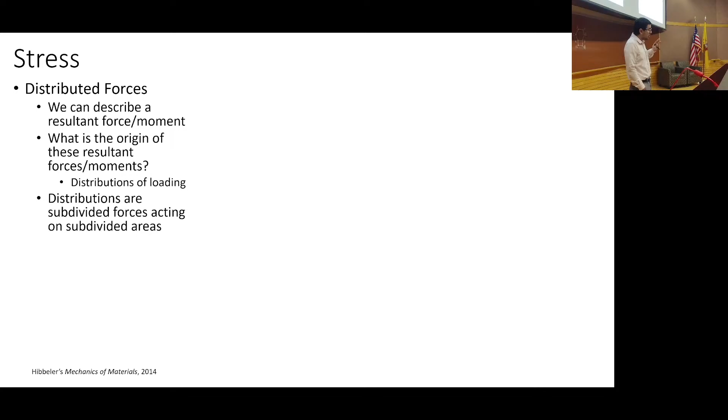So also dealing mostly with fluids, we're going to have stresses. All right, so what are your options for stresses?

What are the stresses we talked about in mechanics of materials? Yes, Andrew, shear stress. Okay, we're talking about shear stress, and we had the tensors with the subscripts. We're going to show a lot of that, we'll just kind of breeze through it, but this is kind of almost like a discussion at this point.

What's the other type of stress that we have? They say axial, normal stresses, right? So in a fluid system, what do you think axial stresses will represent? How do we translate those normal stresses to a fluid system? What are they? Right, so pressure. And when we were talking about pressure, now we've got essentially three stresses that are all the same: sigma x, sigma y, sigma z.

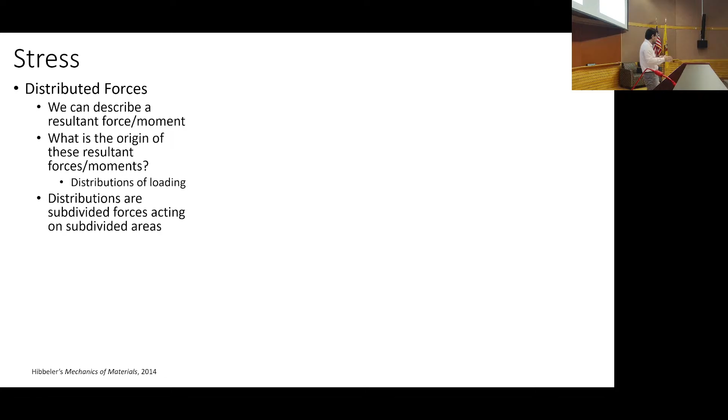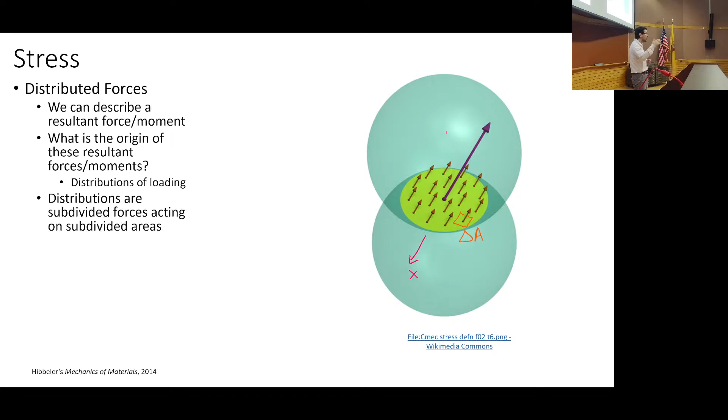We're talking about how we can break these things down. Like on a given surface, you've got some type of traction vector or force involved with it, and we're taking it over a small area. This is review, right, going through this whole business. We're going to say that we have these different components, and the normal component would be like a sigma zz, and that's just going to be a sigma z. And then in a fluid, that's just going to be a p.

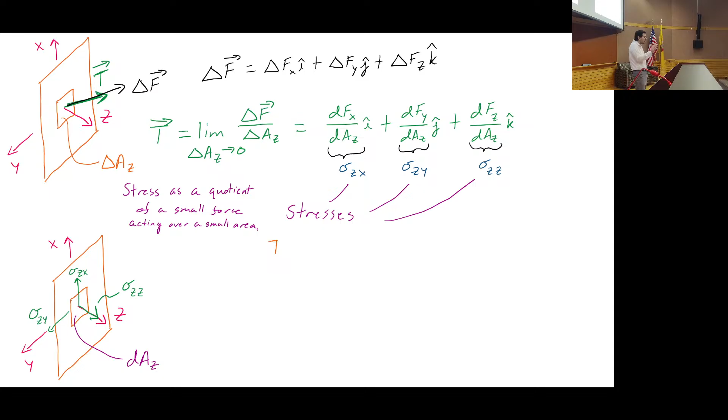And sigma z will be equal to sigma y, and will be equal to sigma x. So this is just kind of trying to make some parallels between what we've talked about in the mechanics world to the fluids world. We talked about how the first subscript usually describes the direction of the face, and the second subscript describes the direction of the stress.

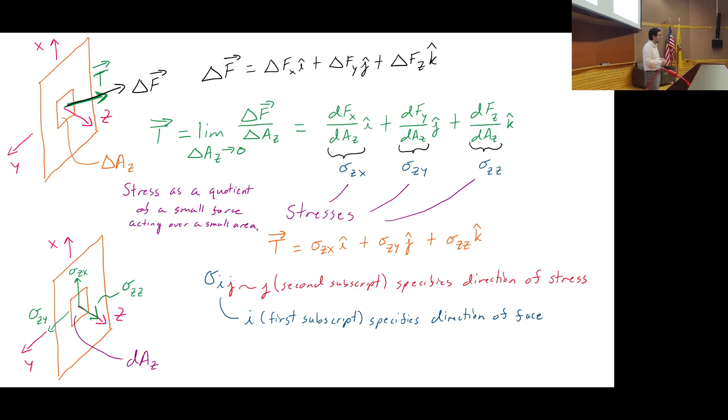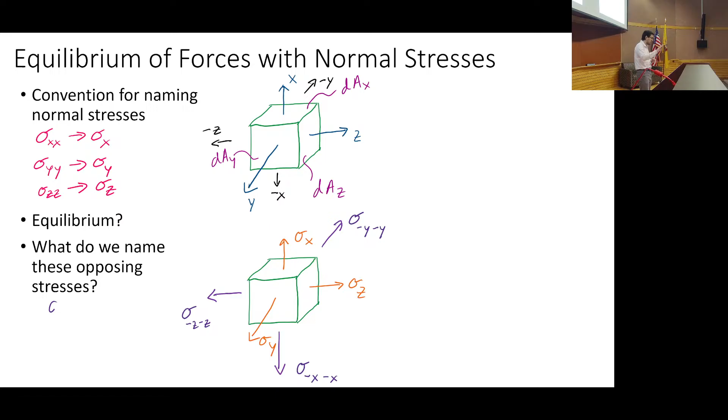So now shear stress is usually the more annoying one, and it comes up a lot. You've seen this, this is just a quick review of everything you remember there. Shear stress could be like tau zx, tau zy, tau xy, these types of things. And we've talked about equilibrium when it's a solid, moments and these various things going on.

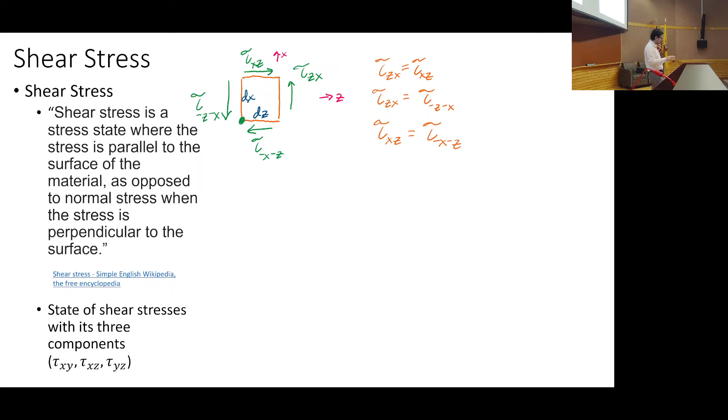It gets a little bit different in a fluid. But one of the things to keep in mind is that when we're dealing with fluids, when we're dealing with solids, we can still come up with a tensor.

And what essentially is the tensor? Do you remember what tensors are? How would you describe a tensor? Sure, Federico. I would describe it kind of like a generalized form of the order of elements within one thing. So like a scalar is a first order tensor, a vector second order, a matrix is like a third order. That's how I thought of it.

Okay, so at a given location, this is a little bit painful, some of the feedback. When you see the feedback in reviews from classes, sometimes it's a little painful. One person wrote back, I still don't know how to describe the stress at a given location in a solid, after the whole class. Like, ugh. The idea of coming up with this state of stress at a given location, I hadn't quite gotten that point across.

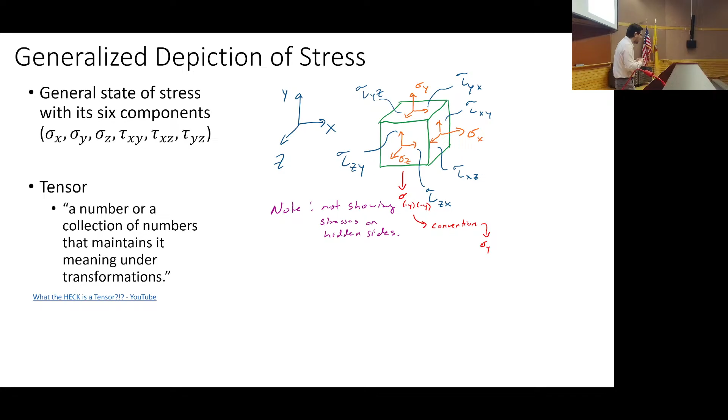And this is how you would potentially write one of these tensors at a given location. What's interesting is, at every location you can write this out for an isotropic material, and if it's elastic and all these wonderful things, simplified, then you really only have 6 components that you're interested in. You have sigma x, sigma y, sigma z, and then tau xy, tau xz, tau yz. Those are the 6. And so there they are.

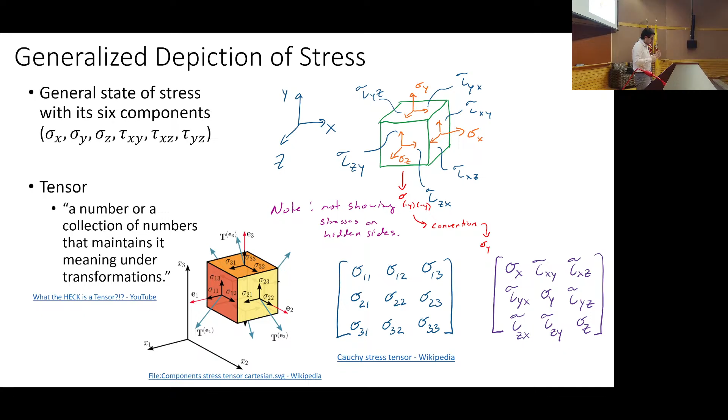Now so that's just a basic review of stress, really quickly. Anything else you want to talk about related to stress in mechanical solids? Any other thoughts, insights?

We often use simplified geometries, and that's because our world is made of a lot of simplified geometries, and then we can think about how the state of stress relates to whether or not the material will fail. We spend a lot of time looking at transformations. And Mohr's circle is one way to describe those transformations.

Even though the information is the same, when we have to compare it to criteria for failure that's been taken at a different orientation, we have to manipulate the state of stress so that we can see it and compare it accurately, for example, to uniaxial testing.

So, how many of you are taking fluids right now? Right, wonderful. How many of you are already taken fluids? Right, wonderful. Okay. So,

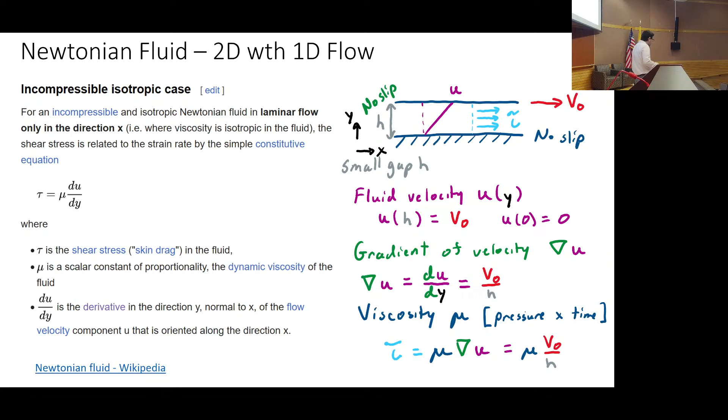So this gradient of u means that we can take this unidirectional flow and begin to think about what happens in 2D and 3D. And so this is just talking this stuff over again. And now, instead of the material element, we have the fluid element, which is a material element, really. And we can think of what's happening to the stresses on this element.

We can think of assigning a coordinate system, we can think of having a small length, and then we can think of it having a shear stress, as we see there. And then we have to have this element in equilibrium, so we put the stresses on it like that. Does this look familiar? Hopefully, yes. Okay. Any questions?

Actually, I have a question for you though. So if I wanted to think about the forces involved here, or yeah, let's talk about force. Let's say I know the cross-sectional area of the top plate and the bottom plate.

Now we talked about what's happening with fluids. Now that you see this V naught, you see the U, you see all this stuff. How much force do I have to apply to this plate on the top to get the velocity V naught? Because this is kind of important. When we do our fluid simulations, we're going to end up thinking quite a bit about lift and drag on airfoils, on cylinders.

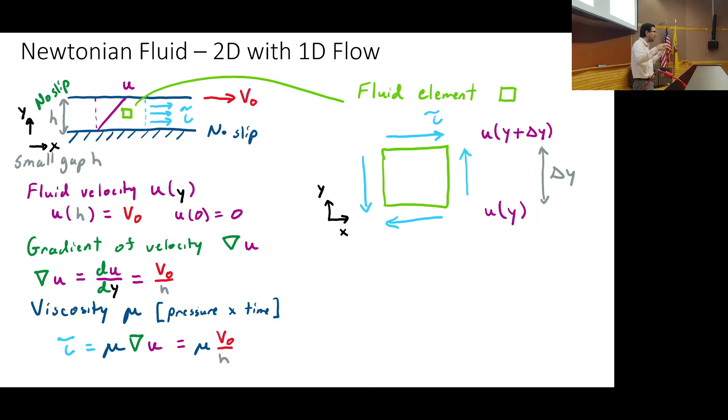Now, this is assuming that this is a Newtonian fluid and it's laminar flow. And we said previously that the shear stress is equal to mu times du/dy, and that's for flow in one direction. But if you have 2D flows, you have flow u in the x direction, and you're looking at the y direction. That would be one. But you could also have a flow in the vertical direction, a v, and be considering what's happening as you go in x.

So your tau xy, which considers both of these components, is actually the viscosity times the sum of the partial derivative of the x velocity u with respect to y, plus the partial derivative of the y velocity v with respect to x. And so you see here we have this tau xy, the skin drag, with partials of u with respect to y and partials of v with respect to x.

And we can then expand that to the 3D case on the right, where you have this matrix. What do you see there? You see, oh, I've got partial of u with respect to x. Is that going to create a shear stress? No. Someone said no, right?

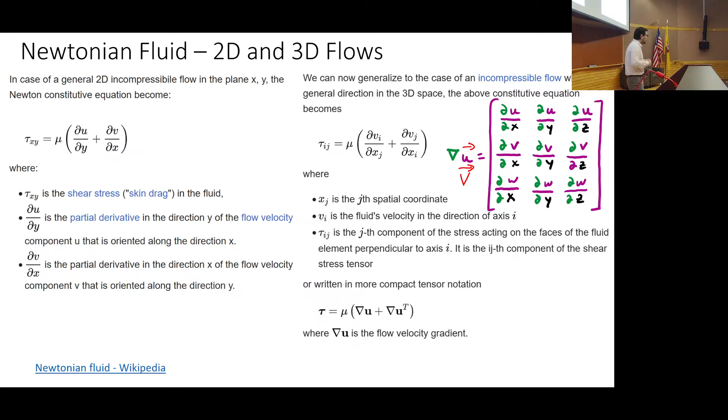So you can think now in 3D that we can describe tau xy, tau xz, the tau ij components, and it's going to be these combinations of the two corresponding partial derivatives. Any questions on this? And then we have this compact tensor notation if you want.

But what we want to get to is that mu is very important in terms of relating the gradients in the fluid flow to the shear stresses that we have in the fluids. Any comments, questions, concerns, ideas?

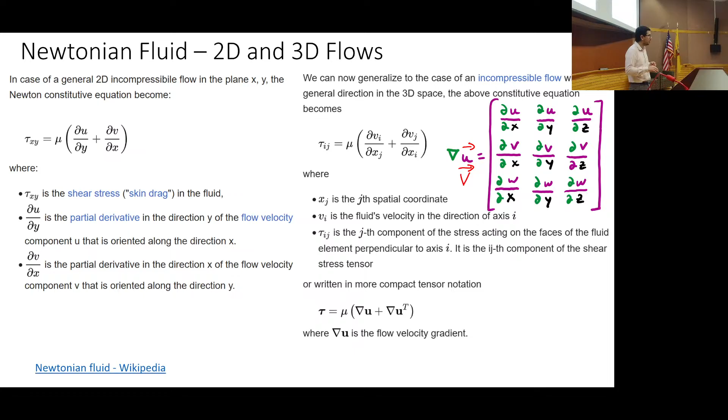Anyone watch these videos? They're really good, right? I don't know. As The Efficient Engineer, I don't know if they've ever made their face public. No, they haven't. Kind of like the organic... isn't the organic chemistry tutor? That's another one of them, right? They just have all these wonderful videos.

Okay, yeah, so if you're interested in understanding viscosity in a very clear fashion, I do recommend this video. And I have another video too that you can watch.

Now, someone tell me, what is the Reynolds number?

It depends on the configuration that you're dealing with, whether you're going to be turbulent or not. So like in aircraft and planes, we're talking about Reynolds numbers that are like hundreds of thousands when you get to turbulence. And then in certain pipes and different things, you're going to be looking at hundreds or thousands.

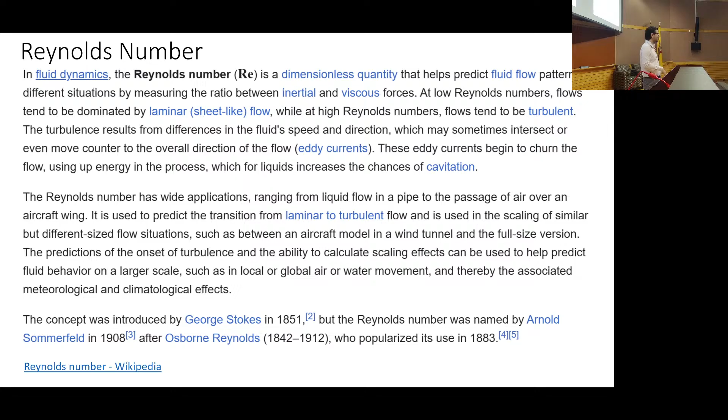Just like in mechanics, this is a linear elastic material, it has an elastic modulus. That's a very nice model, very simple. And then if you've got laminar flow, you're doing Navier-Stokes, and Navier-Stokes is good all the time. But you remember in Navier-Stokes, you could make a lot of assumptions and start crossing off terms, knocking them out. When you get into turbulence, you have to use more complex models and hope that things work out. We'll talk more about that.

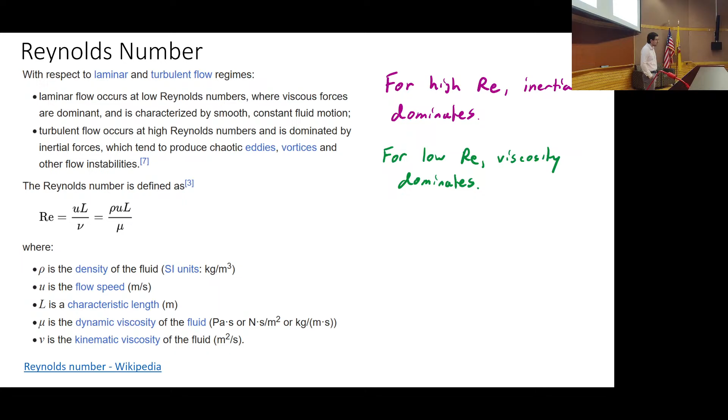So, like we were talking about, for high Reynolds number, the inertia dominates. For low Reynolds number, the viscosity dominates. And again, the efficient engineer comes into play here—if you want, spend a few minutes watching a video about laminar flow.

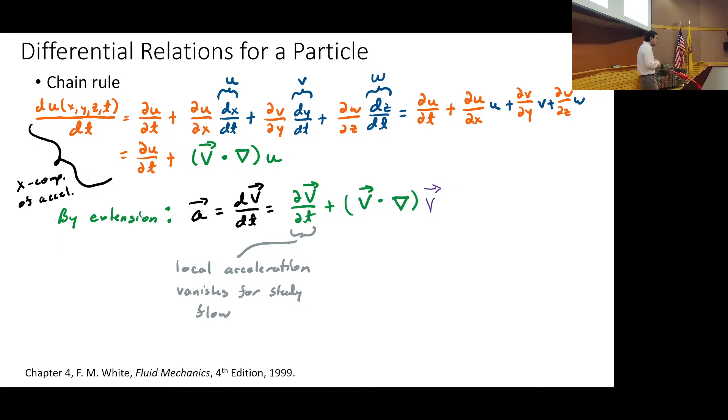This term right there - if the flow is steady, if we've reached a steady state and it's not changing in terms of time, then that term is going to be 0. So we can consider that local acceleration being 0. This can be considered to be a convective acceleration, and this will be essentially just dependent on position, just dependent on geometry.

We're just showing different ways of describing the velocities and accelerations of particles. When you do your finite element analysis, or finite volume analysis for this class, what do you think? What do you want to plot? If you have a fluids problem, what are you usually interested in? What are the parameters you're interested in describing your system? Just imagine you set up your geometry, you set everything up - what do you want it to tell you?

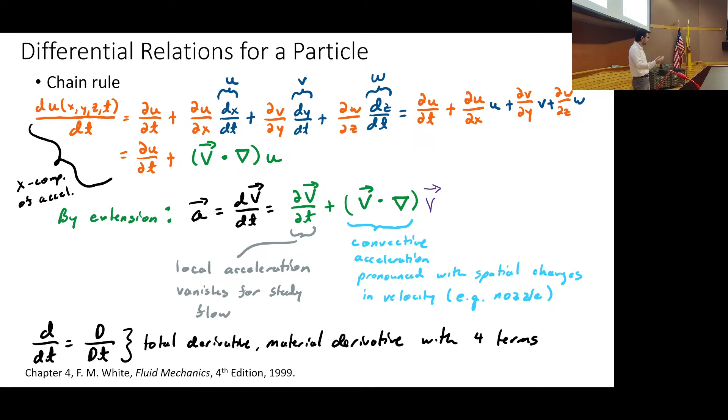We got these fields, and they have to satisfy momentum, and they also have to satisfy conservation of mass. So we introduced our first control volume. Spoiler alert: the finite volume method uses a bunch of control volumes, just like the finite element analysis method discretizes problems in space into elements - they're really kind of like elements, they look exactly the same graphically. We're going to call those volumes.

So this is a control volume. And remember that if you have a constant density, then this volume also has to be conserved. So if you have a certain volume in, you've got to have a certain volume out.

That is something that's very important for the finite volume method. Using that, in a few slides you'll see that you don't have to use much math actually, compared to the finite element method, and it's very accurate - that's why it's kind of popular. And if we want to think of a summation or integral form of the mass conservation - we have a differential form. Remember, in fluid mechanics, you have the differential forms, and then you have the integral form.

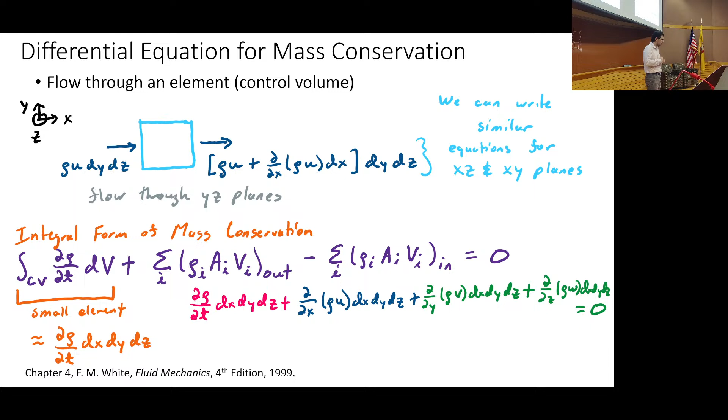And assuming that the density of the liquid is changing in this control volume, the output has to be fully accounted for, then we can break it out in differential form. Then we can introduce this divergence term.

It's nice when fluids are incompressible, right? You remember that air is often not incompressible, but for low enough speeds, you can kind of assume that air is incompressible. If you can keep it incompressible, that's kind of beneficial.

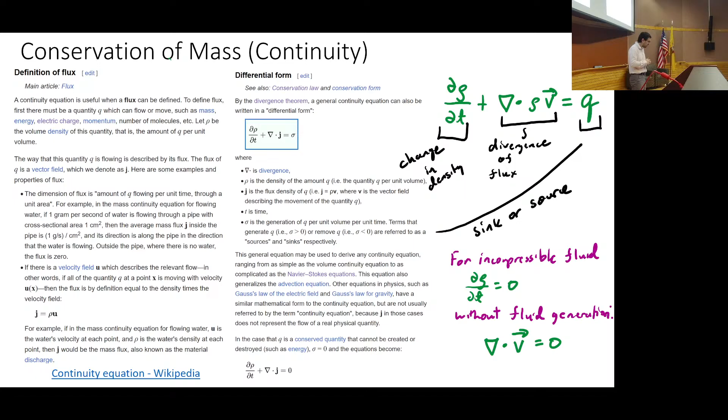And again, if you have this conservation of mass in place, which is often called continuity, then you can begin to break the problem into parts that have simple boundaries for the control volume, so that you have flow normal to that boundary, and somewhere else also flow normal to that boundary, pretty much all going normal to the boundary. So in this case, you might have a nozzle, and you have some velocity at the inlet times that cross-sectional area, a conservation of volume. We can say that the velocity at the outlet times the area of the outlet has to be equal to the inlet velocity times the inlet area.

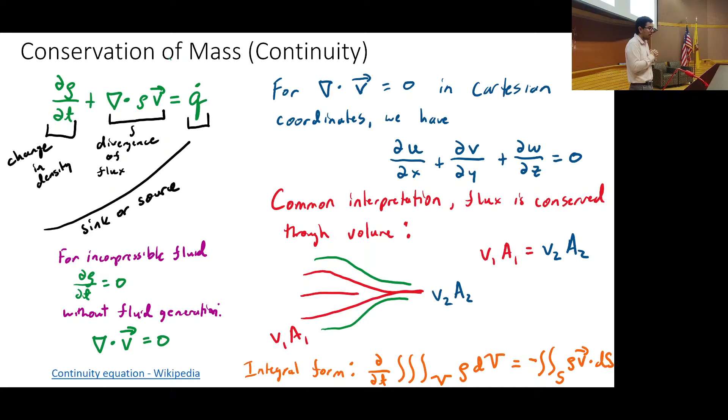Now, for momentum, we have to think about the summation of forces, and we begin to think about volumes and densities. If we think about volumes and densities, that gives us a mass, that gives us the inertial component. And what do we also need? We need an acceleration component, so acceleration would be some type of derivative of velocity.

So that's essentially what you're seeing here, right? You're seeing velocity components times density, so rho times some type of v, and some derivative of that velocity, so rho times acceleration. And then you're seeing a volume component, so rho times volume gives you mass. So we start to see that we can develop mass times acceleration components, and those are going to be forces. And if you think about momentum, sometimes we're thinking about mass times velocity as well.

So we can think about the stresses now acting on the surfaces of these control volumes, and that's another thing we might be thinking about. We might want to know what the shear stress of the liquid is, in addition to understanding what the shear stress in the flows might be, or the pressures and the normal axial stresses as well.

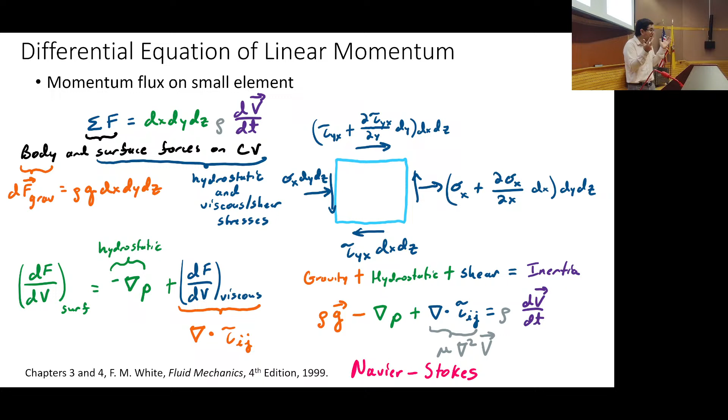Nonetheless, we'll end up doing things like airfoils and flows about cylinders, which are relevant to the real world. That lets you take the baby step and then move on to complicated problems for a car company or aerospace company interested in different objects, or do your final project, which hopefully will be relevant.

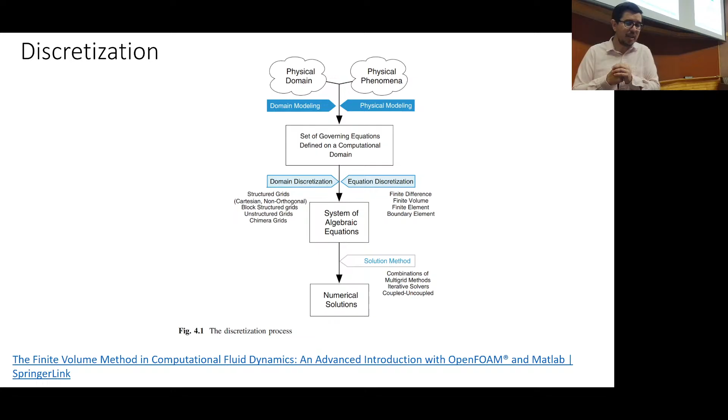So in the last few minutes, let's talk about the finite volume method. I like this figure, it gives a nice overview of what we try to do in finite element and finite volume methods, or simulations in general. We have to understand something about the physics and something about the domain over which we're doing our simulations, and we need to know the equations that will govern it.

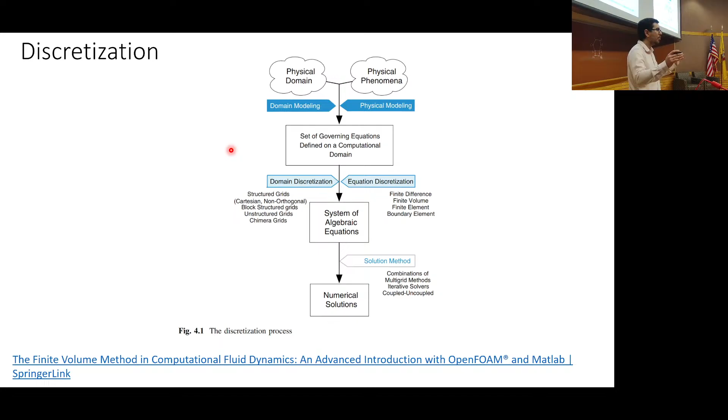What are some of the equations we've covered up to this point in the class? What are some of the governing equations? What physics have we been looking at so far? Anyone? Yeah, go ahead. The heat equation. What else? Velocity, okay, so we've been talking about velocity.

What are the governing equations that affect velocity in different systems? What are the physics? You don't have to give me exact equations, but what physics have we been studying? Because one point of this class is that we take one physics at a time and learn how to simulate it. So I'm asking you, imagine going home this weekend and telling your family you took a class on simulations. What did you simulate?

We talked about particle dynamics, not particle physics of colliding particles, but particle dynamics. We talked about the heat equation and molecular interactions. We've even talked about how you can model particles bouncing off of walls, or particles bouncing into each other. We established these governing equations, and often it's the negative gradient of the potential functions that dictates that physics. Now we're getting into fluid flow, the Navier-Stokes equations.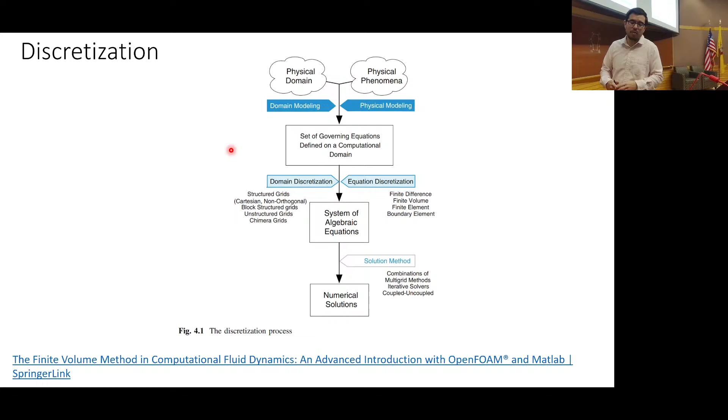We have to discretize our domain, and that's, like we talked about, space. Sometimes we also have to discretize the equations we use. What is maybe the foremost example of discretizing our equations? Which method is almost like discretization is in the word, but it's a different word.

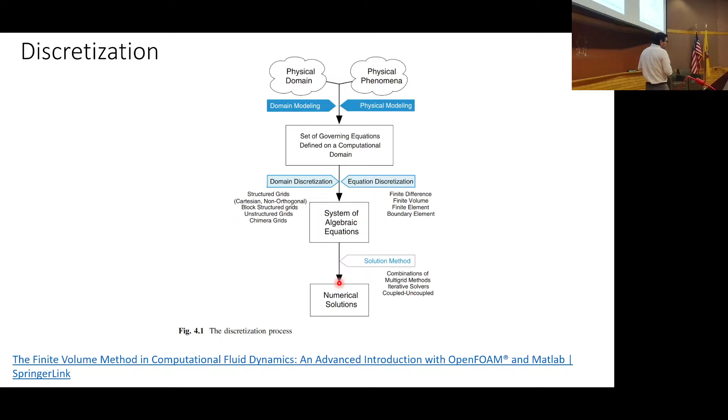Finite difference is kind of the epitome of taking the derivative, which is generally a continuous function, and discretizing it. Finite difference, finite volume, finite elements, boundary elements - different techniques there. Ultimately we get a system of algebraic equations. We invert that matrix, if that might be one of our approaches, or we simulate them with the Euler method or velocity Verlet method, and then we iterate and get numerical solutions.

I like this graph - it gives a nice overview of what we're trying to do in this class. It's in the SpringerLink book. There's a whole book on finite volume if you want to go home and read it. So we're just giving the overview stuff.

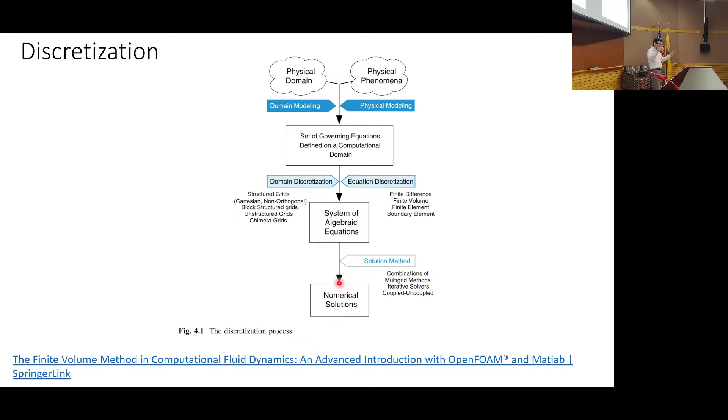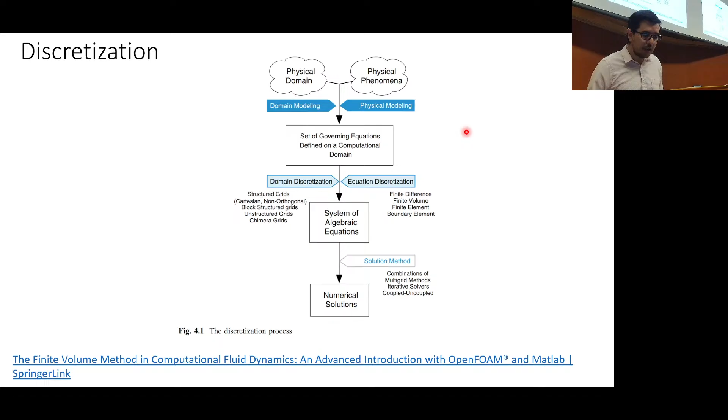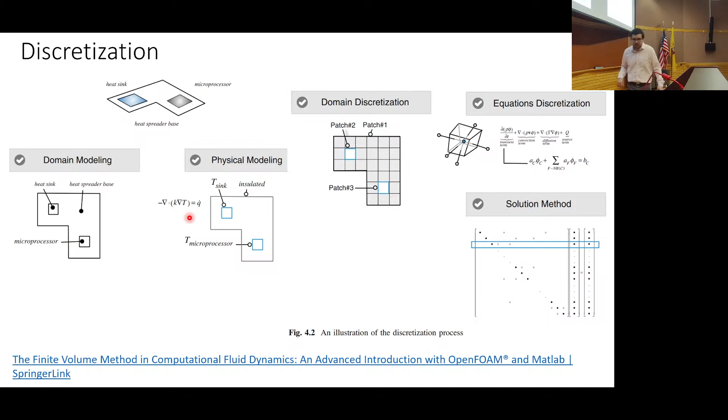We think of these steps: you have to have some type of domain, you have to have governing equations, you have to do some discretization, and you have to solve. Here's the domain modeling, here's the physics - which equation is that? We've got the heat equation there essentially, with temperatures and a boundary condition, all these things.

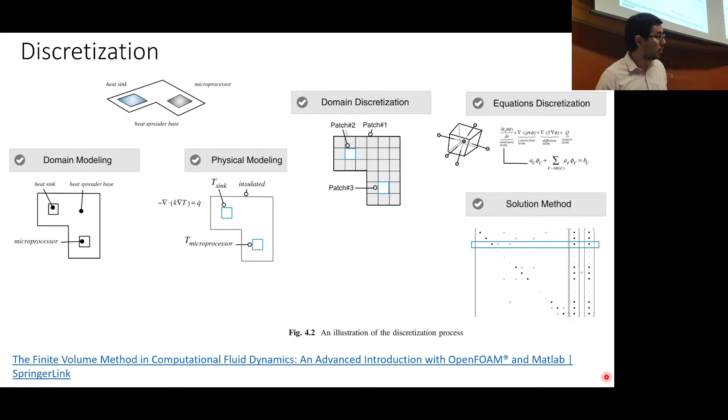Then we discretize the domain, and we come up with some interesting equations. Then we had to invert a matrix to solve for the things that we care about right here. This is the matrix that we have to invert and multiply times essentially this forcing function - KT equals F.

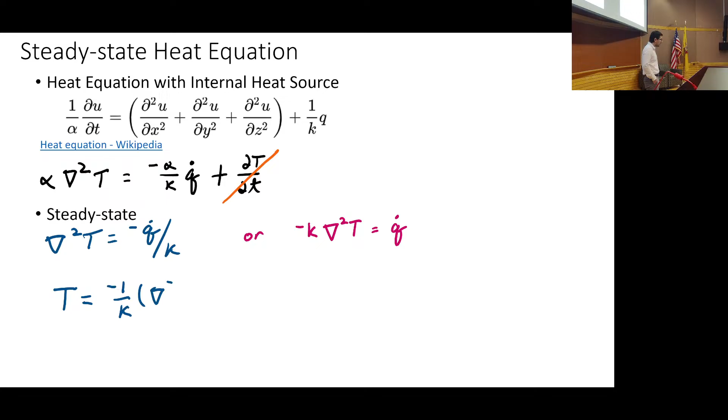So let's look at this heat equation again. Often we're looking at steady state, which we've described before, and we've talked about what it looks like and the inversion of this matrix. Here is an example using the heat equation. Once again, it's usually easier to take an element inside, not on the borders. On the borders you have to consider different boundary conditions and make sure you don't mess it up.

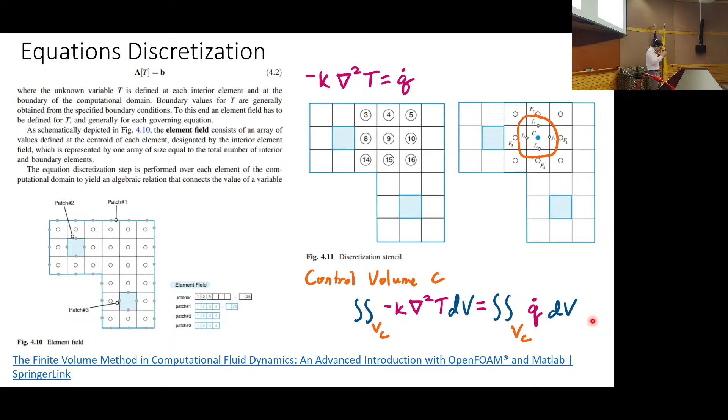We can think of using control volumes with this heat equation, integrating both sides. These are kind of like a volume integral - this is a 2D element, but it's like a volume integral. You've got the control volume, and you can think this has got some finite depth into the page. Now we pull out something called the divergence theorem, which allows you to take a volume integral and express it in terms of a surface integral. The left side experiences this divergence theorem - we go from the volume integral on the bottom left, and now we have a surface integral, dot ds, where it was with respect to dv before, but now it's dot ds.

And then we also look at the right side of the equation, and we're integrating over this volume, and we have a q dot on this volume. So that would be like a heat flux into the system times the volume of the element, and that's got to be equal to what you see here.

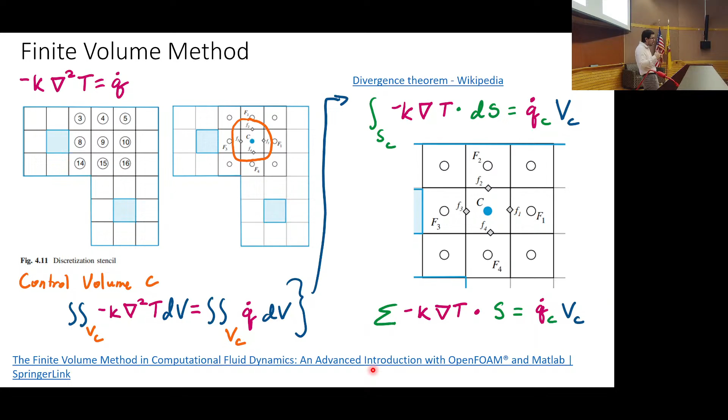So now these are surface integrals. Well, that means that I've got to apply them at each of these 4 surfaces. So these are nice orthogonal surfaces. So I'm going to do this integral in a discrete form. And I'm going to look at, okay, what is the k delta T? Left side element, top middle element, right middle element, bottom middle element, right?

And we can look at that summation, so we discretize this integral relationship to a summation where you're looking at these faces 1 through 4 with this equation dotted with the surface 1, 2, 3, 4. Okay, so you see this is SF1, SF2, SF3, SF4. And how do we go about describing surfaces? Remember, we talked about particles before, bouncing off walls. We describe them with a normal direction and a location. In this case, we're just looking at the normal direction, and we're describing them with a length.

Okay. So here, this SF1 on this side, that's got an i vector coming out, and it's got a length delta y. And SF2, same thing. It's got a length delta x, F2 we can call it, the sign there, and it's in the j direction. So we can take these dot products. And what is this k delta T? This is just a gradient. How do you calculate a gradient discretely?

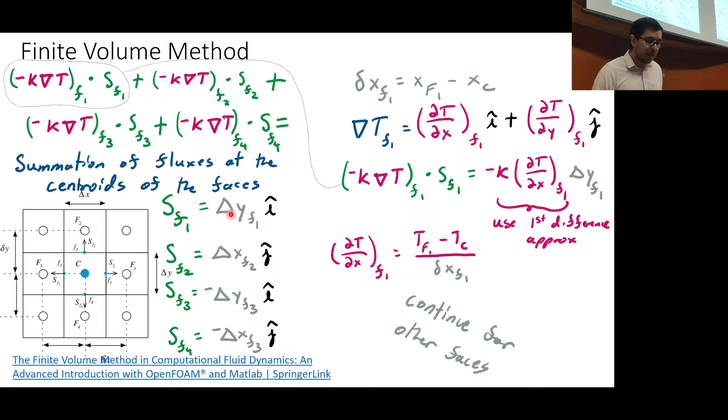All right. So now we've got a system, and there are these different components, but we start assembling, and maybe it's more clear over here. You've got to look at the summation of the fluxes. And what is the summation of the fluxes? Well, energy has to be conserved. So if there's no heat flux into that element, then the summation of all those fluxes has to be equal to 0. But if you have a heat flux in or out, then that's what it has to be equal to.

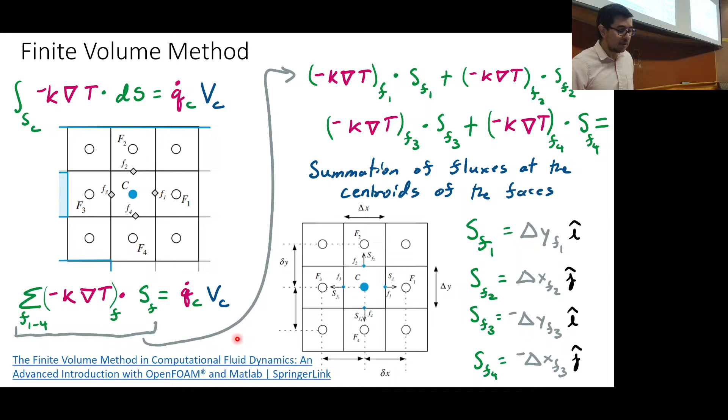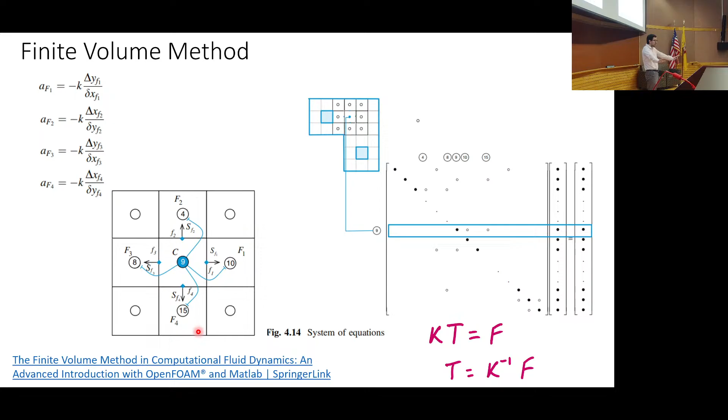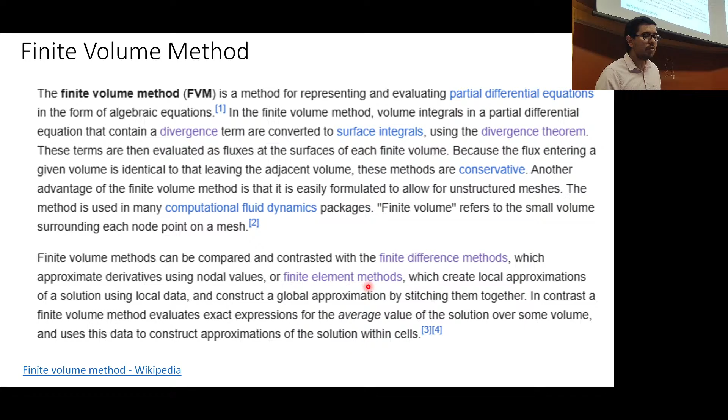So you assemble all those equations into a big K matrix, you invert it, and you try to solve. And this is essentially an example that's using a steady state problem. So the finite volume method is a method for representing partial differential equations. And it's similar to the finite element method. And there are opinions and facts that we'll compare.

This is like the Eagles versus the Kansas City Chiefs. They have different strengths and weaknesses. And, well, you can root for one or the other. But maybe what's different is that if you simulated the Chiefs and the Eagles playing each other, I guess you could probably have different winners. So in some cases you want to use finite volume maybe, in other cases you want to use finite element.

Unless you're COMSOL. If you're COMSOL, you say, no, you don't need this finite volume thing, just do finite element. It's the way most people do things. But you saw how complicated the finite element method is. So finite volume actually has an easier setup usually, and it's accurate. So that's the benefit. So here are some breakdowns in terms of when you might use the finite element method, and this is from COMSOL.

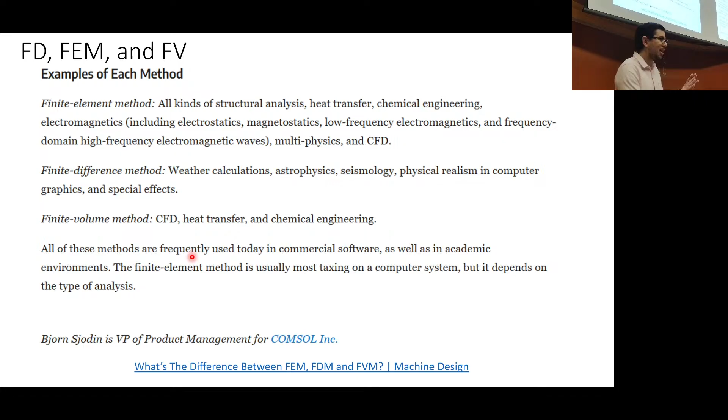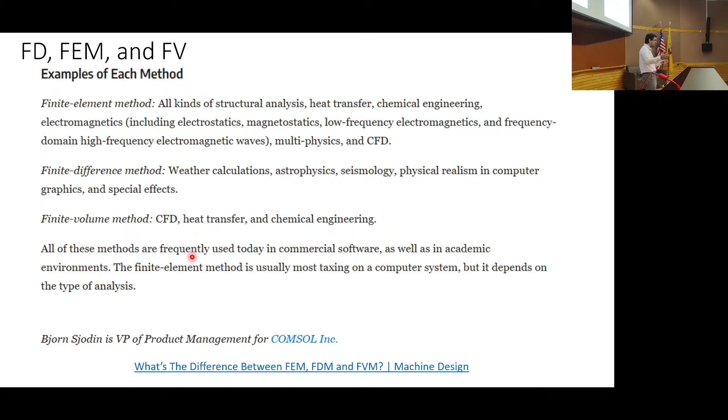So they'll say finite element is essentially good for everything. Finite difference is good for some things. Finite volume is only good for a few things. That's just how they put it out. So what is ANSYS's approach? We give you the whole kitchen sink. ANSYS will do finite element if you want to do it. But if you're doing fluids, they bought Fluent, and that's a finite volume method. That's what you're going to be doing.

So anyway, today we've reviewed some aspects of mechanics, both fluid and solid, and we've introduced the finite volume method.